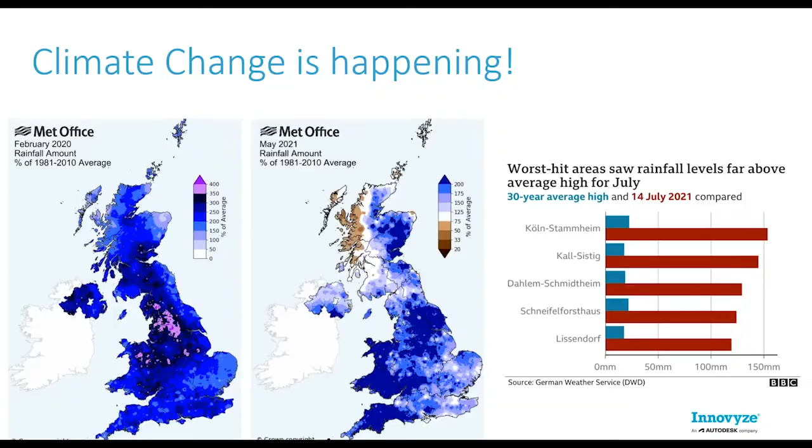A nice high proportion. I think we're stuck on 80% of the audience; it's a big audience. Thank you. Thanks, Sam.

So there we are. I think that's an interesting mix there, Samra. What do we make of that? Has this been your experience, your personal experience as well? Yes, a lot of people blame site constraints, and from what I could see, this is, I think, the highest or the most common reason why people are not pushing for SuDS.

Now, I myself used to blame clients. I used to say, "Oh, my clients are concerned; they don't want SuDS," and we jump when they say. But I've recently realized that it is my duty as a designer, or when I was a designer, to inform clients and give them the reassurance and help them make an informed decision.

So in this presentation, I will share the common 6 reasons I've heard from designers and clients why they don't want SuDS, and we will maybe have a discussion and iron out some of these reasons, or hopefully all of them. Yeah, it's interesting because, plus or minus, between the 5 different options there, it's ranging from 17% to 26%, so very slightly in favor of the site constraints. So it's literally where we can't physically get our heads around how we can implement sustainable drainage systems.

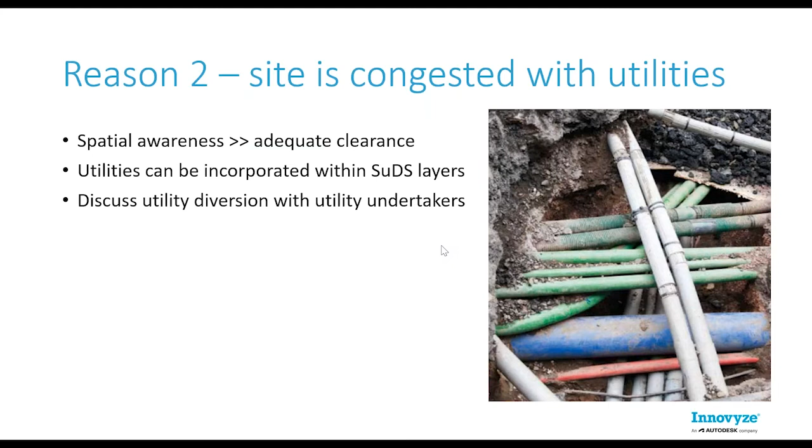Another reason people talk about is, oh, I cannot infiltrate, so I'm not gonna implement SuDS. Well, yes, high groundwater table, impermeable soil, proximity to building foundations, or being on top of a source protection zone can impede infiltration, of course. We shouldn't infiltrate if we're on top of an SPZ, especially if we're picking up highway runoff.

And sometimes we're worried about structural problems with the foundation, especially if we are sitting on top of chalk. Maybe there are some dissolution features that we don't want to develop. But the answer for this is SuDS doesn't have to be infiltration SuDS. There are other types of SuDS we're going to talk about today that you can consider. They could be storage SuDS. They could be conveyance SuDS.

So you can block the infiltration. You can line your SuDS. You can line it from one side if you're worried about a certain side that is close to the foundation or to a highway structure, and allow infiltration from the other side. I mean, that would hopefully iron out the problem.

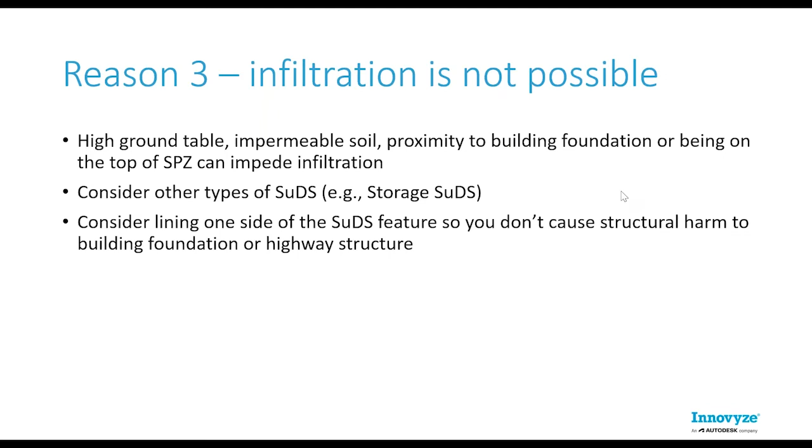Another reason people talk about is the location. So if you're near an airport, you cannot have SuDS that attract birds and some sort of wildlife. And in this instance, yes, we shouldn't have a pond, we shouldn't have a detention basin and a swale, etc. But we can still have an infiltration trench. We can still have a rain garden. So consider other types of SuDS that don't attract birds and whatnot.

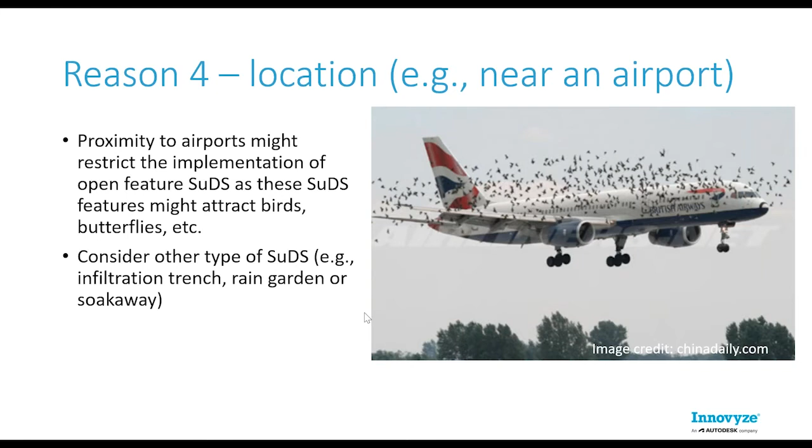Now, another reason I heard as well is the cost and maintenance. They say, oh, the client is worried about the cost. They don't want high maintenance features. And my response to this is, have you calculated the cost of flooding? A well-designed and well-constructed SuDS is not extremely more expensive than an equivalent landscape feature. I mean, a couple of inlets and a couple of perforated pipes will not blow the budget, but a destructive flooding will definitely blow your budget.

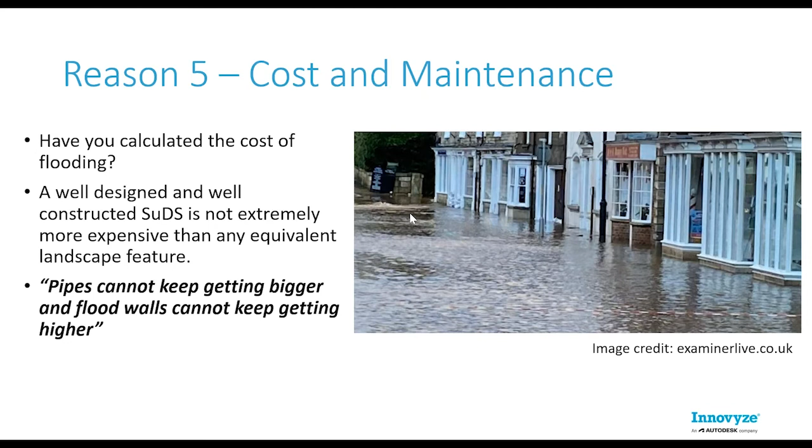Well, if it is, when the swale is full of water or surcharged, maybe the water will take a different route. So the length, the slope, the flow route, the roughness could be different, depending on the vegetation, the permeability, the hydraulic behavior. So a lot of basic parameters we're not sure of when we look at SuDS at the site scale or at the catchment scale. So my response to this is, don't worry too much about this.

As long as you understand the function of SuDS, what you're trying to achieve. When I say function, if you're trying to have some storage, then think about the volume, the storage and the levels, etc. If you're trying to convey the water from A to B, then you need to think about the length and the slope. Maybe you can do some stress testing for various scenarios. If you're trying to infiltrate, then look at the soil, the layers underneath, and what can happen. Introduce maybe a clogging factor, and rely on the SuDS guidance available.

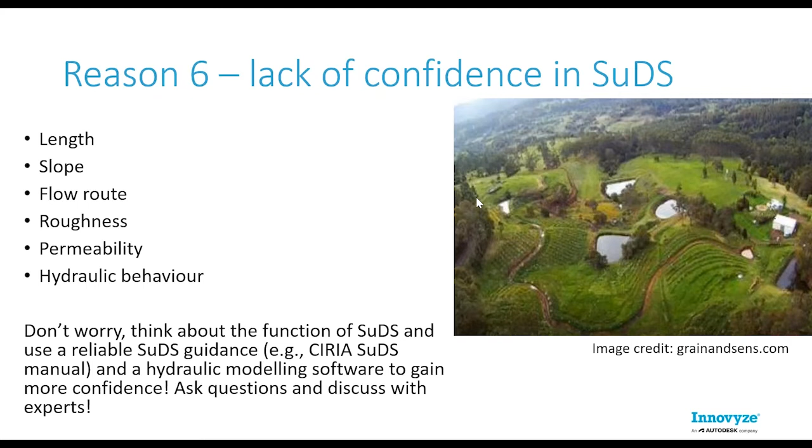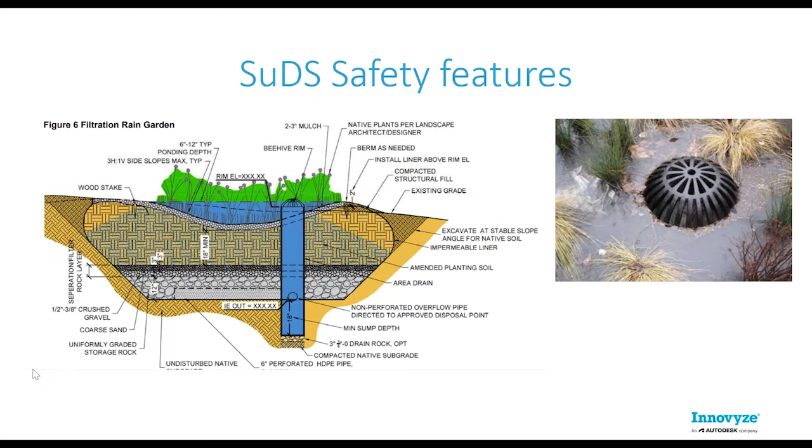Now, remember that you can always have safety features in your SuDS. For example, whenever I design any rain garden or SuDS feature, I normally have a spigot and a vertical pipe that can allow water to bypass the soil, so the soil doesn't become a bottleneck, and take the water directly either to the storage layer or maybe a gully. So your SuDS can become a gully when it's overwhelmed. So basically, if you flood, you're going to have to think about other elements in the system to blame than SuDS.

And yeah, as I said earlier, don't get hung up on the name of SuDS. I see a lot of debates about, yeah, this is a detention basin. No, this is not a detention basin, it's a pond. Oh no, it's linear and it's taking water from A to B, so I'm going to call it a swale.

Understand the functionality, and maybe you can categorize SuDS into 4 categories or 4 types: storage SuDS, infiltration SuDS, conveyance, and source control. Storage SuDS is like a pond. We use it to store the water. Conveyance is when we use SuDS to take the water from A to B, and it can have a storage element. So of course, maybe we can have one SuDS that has 4 elements.

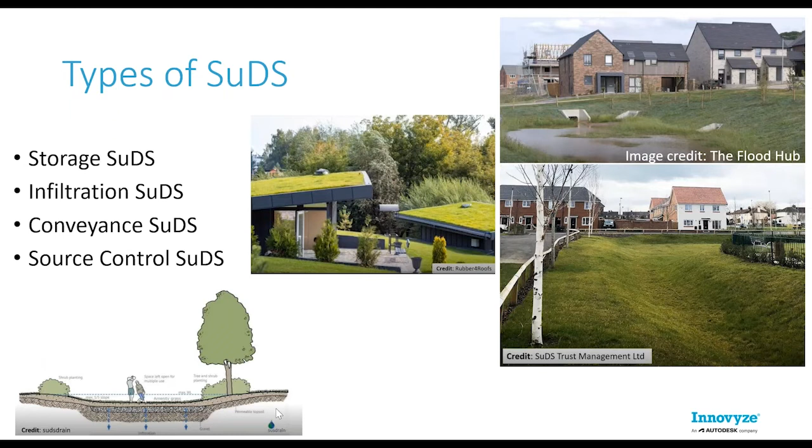Okay, so with that, I'm going to show you an example and talk about the typical steps to design and model a typical SuDS project on a master plan level. I will try to cover most aspects and issues encountered when designing, modeling, and making decisions related to sizing and constructing SuDS features. And then we will see how InfoDrainage will accelerate the process and save time that we normally waste on design iterations resulting from the lack of spatial awareness within a hydraulic model.

Now, in a typical SuDS project, the client issues a brief to the designer, communicating their objectives and saying, okay, this is what I want. I would like you to propose SuDS in this site. And this is a flood risk driven project, or maybe an aesthetic driven project, or water quality, whatever. So you're going to get the client objectives.

And then the designer needs to start with a feasibility assessment, checking the levels of the site, so maybe commissioning a topo survey, checking the utilities within the site, so commissioning maybe GPR to understand where the utilities are and how deep they are, and this is very important. CCTV of the existing drainage system, because we're going to connect SuDS somewhere.

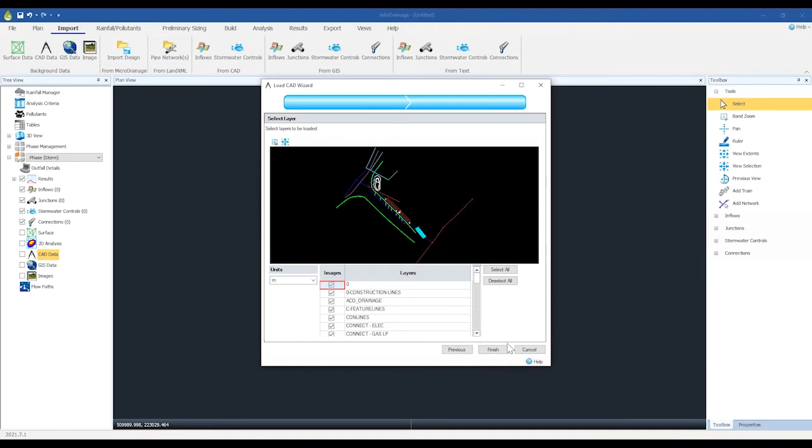So if I open InfoDrainage, the first option that I have here is to import a CAD layer as a background layer. This will bring in all the constraints that I talked about and the sketches that the designer has agreed on with the client. So if I import the data here and say, give me the SuDS background, now we see that this is the site.

It's a carriageway. We're going to drain it into SuDS. And there is some runoff expected from permeable areas, so runoff from greenfield areas, and that will be captured maybe in a cutoff drain here. So we're going to have a swale that is serving both permeable runoff from the east and impermeable runoff from the carriageway. And we checked that the only possible way to discharge is a combined sewer.

So we can rely on infiltration to help us reduce the discharge, but we need to connect to a combined sewer in the area. So we talked to the water company. The water company said, oh, this is a combined sewer. We have an objective to reduce the discharge as much as possible. And yeah, we agree with them.

And this is why we need to find a solution to slow down the response, reduce the rate of the discharge into the combined sewer, and ensure that we don't flood our site. So how are we going to achieve this? If we rely on a gully pipe solution, we're going to end up flushing the combined sewer during the peak of the storm. Water will shoot off really quickly in maybe 8-10 minutes.

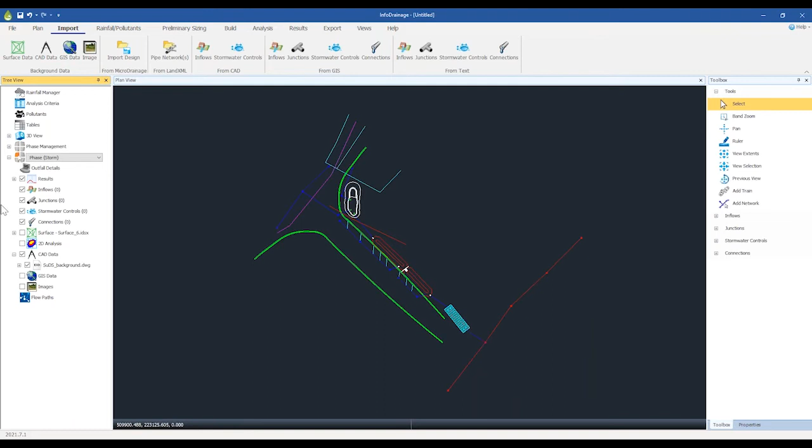Water will be in the combined system. It will surcharge really quickly. We're going to flood upstream, and we're going to cause a problem, and no one will be happy with that. So what we need to do is try to find a way to slow down the water and capture the water in stages. And when we commissioned a topo survey, which I will import now, I will right click on surfaces and load surface, and I will import the surface here.

So we commissioned a topo survey, and we realized that this is a very steep site. We see from 197 all the way to 188 here. So we need to think about these solutions that I talked about, the check dam and maybe compartmentalization, etc. So how will InfoDrainage help us accelerate this?

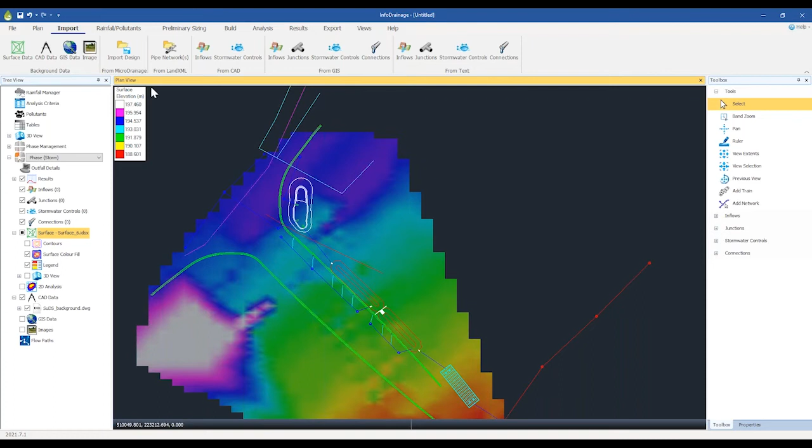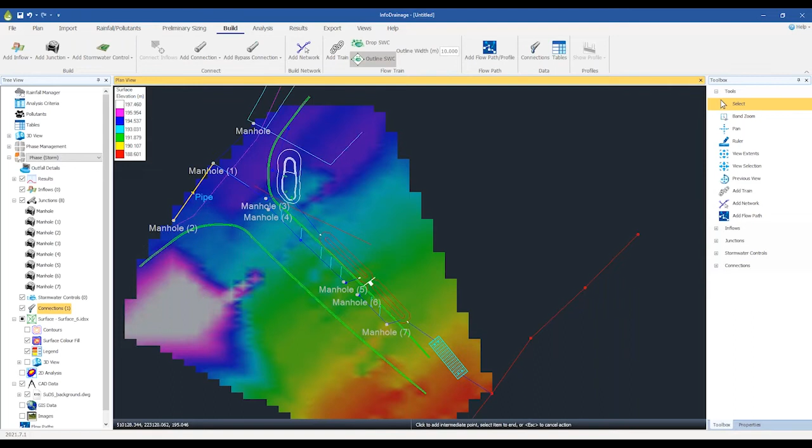So in the past, we would typically start modeling the pipe network. So if I start, for example, building the junctions, I can say, okay, I have a junction here, a junction here, here, here, and then I can start building the connections, the pipes: I have a pipe here, another pipe here, and a pipe here, and similarly, and then we start building the SuDS structures.

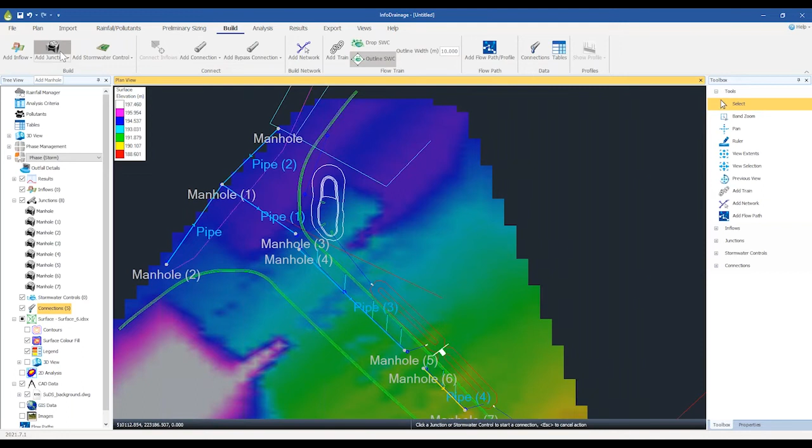Now, typically, we used to drop the SuDS structure on a triangle. It used to be some sort of a triangle in the middle, and we get all these incoming pipes towards the triangle, and you're gonna get some pipes with the wrong length. We're gonna get some dummy pipes to get things working, and there is no spatial awareness of where the SuDS footprint is, and whether the size is working or not, whether the volume has been achieved.

And in this case, if I turn off the surface, this pond here is surrounded by utilities, by a gas main and by a high voltage cable, and we've been given this top area as a constraint. So we're going to see now how you can model exactly the same area in InfoDrainage, and you can get the inlets represented exactly as they're going to be built, so you don't have to always explain to the person who's CADing the drainage design, oh, this is a dummy pipe, don't worry about this, you need to put this here. And normally this is when mistakes happen.

I experienced it myself when a client called and said, hey, can I get you guys to upsize the pond, or maybe change the location, so we moved the pond to the right, etc. Because of this disconnection between the modeling and the CAD, we ended up clashing with utilities. And it does happen. It happens all the time.

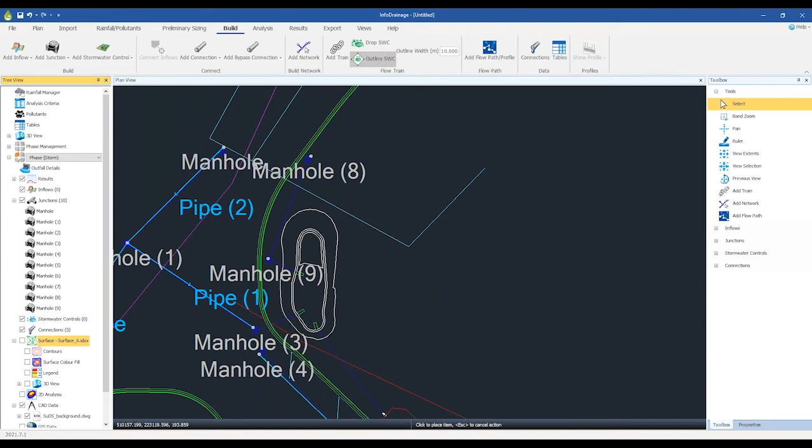Then we have to do another design iteration and look at another solution, maybe downsizing and taking the new volumes and the new footprint, base area and top area to CAD, checking things, and then putting this back, because we used to see only a little triangle in the previous software, MicroDrainage. And in here you can easily see where things are, where the inlets are, and where the outlets are.

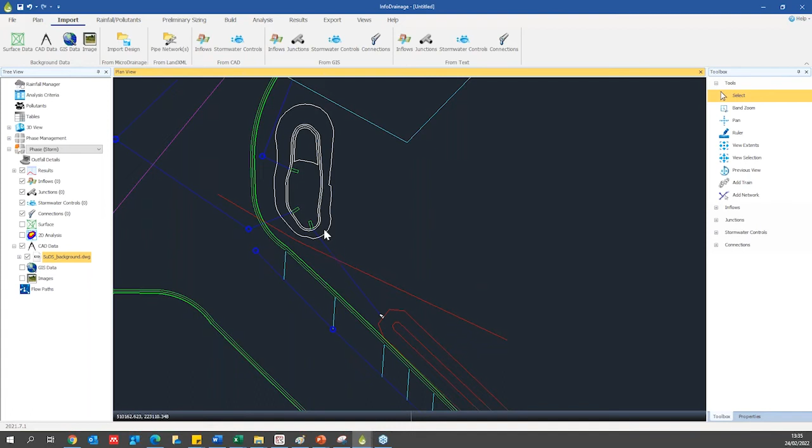And not only for visualization purposes, the software will calculate on your behalf the time of concentration based on where the inlets and outlets are. So if I want to design this pond, you have the option to import the top area as a GIS polygon and work from it, or you can digitize it if you want. So you can easily go to build, add stormwater control, and add a pond, and say, okay, I have a pond here, and this is the top area of the pond.

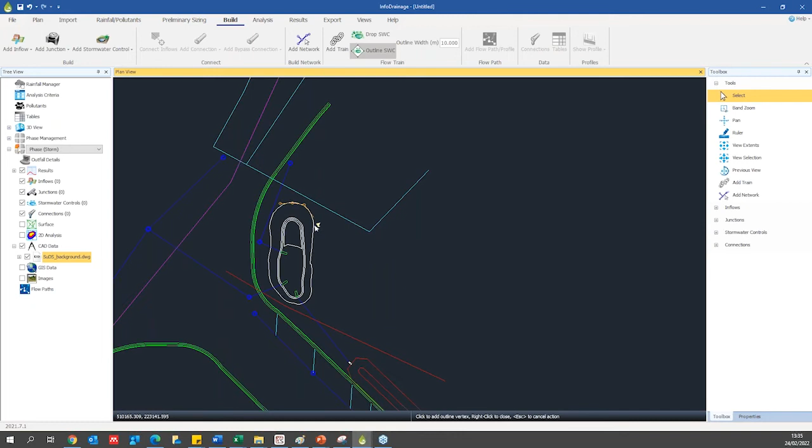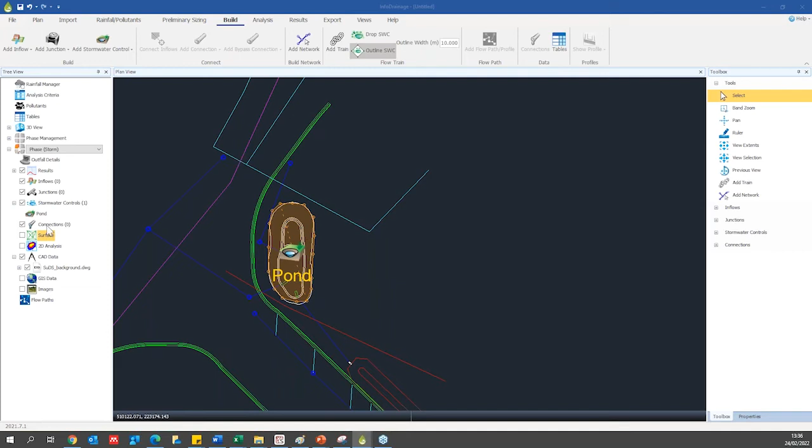And then once you have it, you can double click and, of course, we need to import the surface again. Okay, so you can click on the pond, you see that the exceedance level has been picked from the surface, and you can say the depth is 1.2 meter, and it will calculate the base level, and then you say at 1.2 meter, the area was 575,

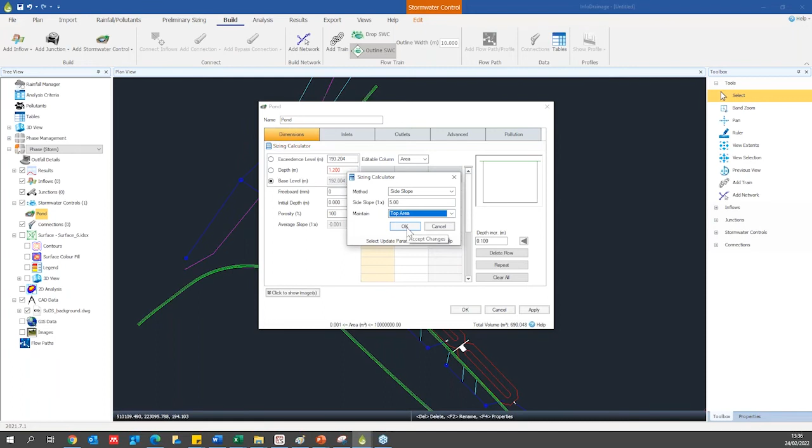and you can go to the sizing calculator and side slopes. You say, if I want to go 1 in 3 or 1 in 4, or let's go 1 in 5 to make it people friendly, and I want to maintain the top area. So it can work back from the top area to the base area, or to the bottom area, or you can work from the bottom area.

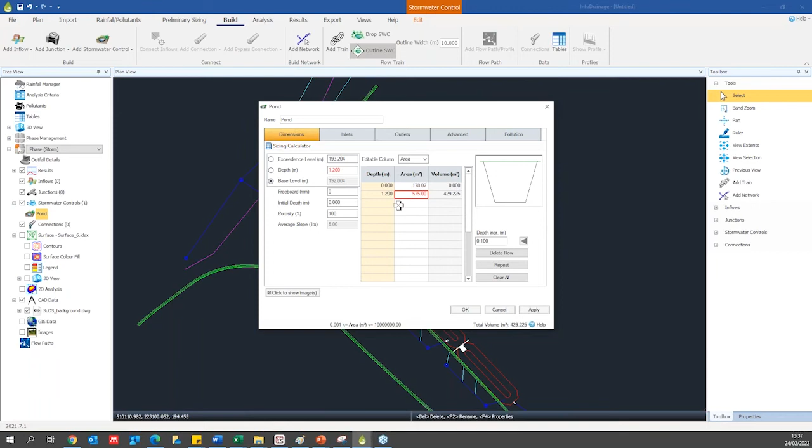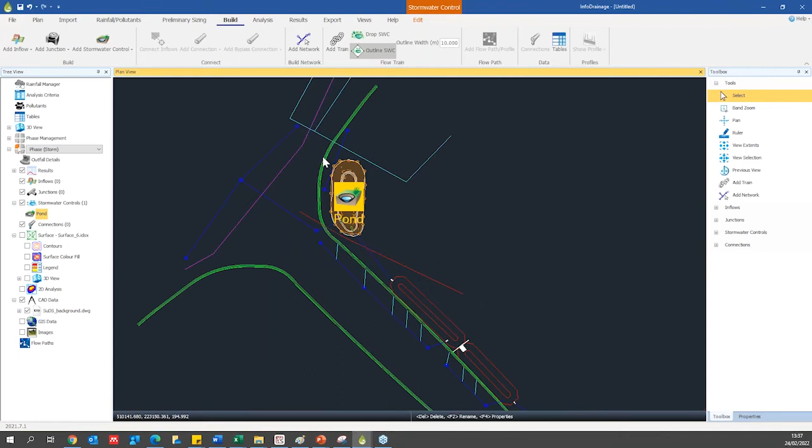If you have the bottom area and you want to know what is the land take, you can call the client and ask them to purchase land. Now you can give them this number, for example, 575. But in this case, during the concept design, they gave us what is the maximum area that we can take, or the land take, and we worked backward. So let's say we agreed on 178 and 575, and then you can say okay to that. And now you see this is the base area.

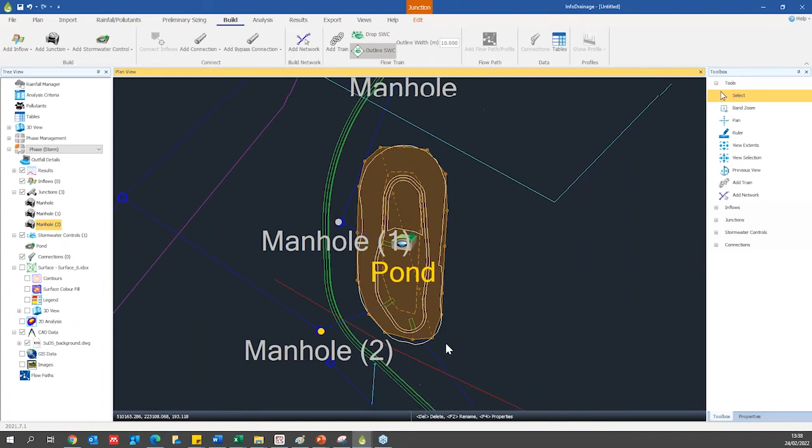Now when we want to connect the pipes in here, we're not connecting into the center of the pond. If I add a junction here, another junction here, we're basically connecting into wherever the inlets and wherever the outlets are. So in this case, if I go to the connection, I can say this pipe section is going to go into this inlet, and this pipe is going to go to this outlet, and that will be taken into account when calculating the time of concentration within the pond.

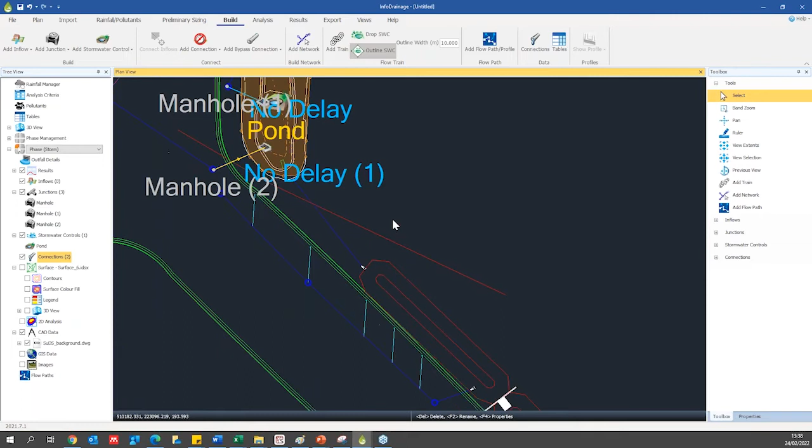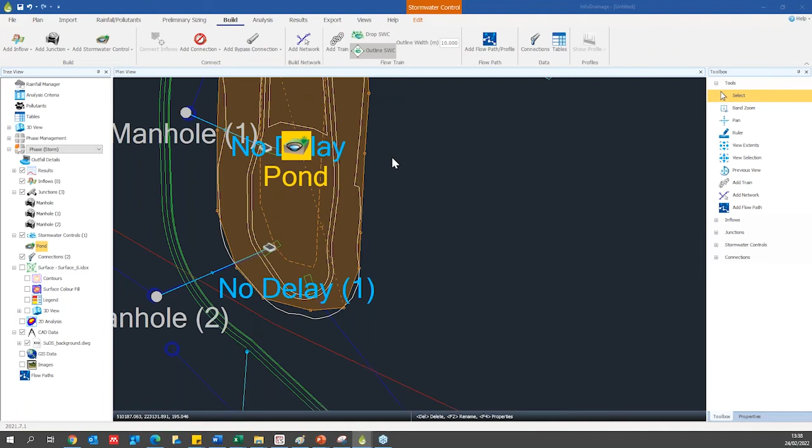And then once you build the downstream systems, and we're going to take an outlet from the pond, the software will realize immediately that this is water leaving the pond, and we will see how we're going to model the flow controls. Okay, and now we have the swale. Of course, once we get to the pond, you can add infiltration from the side, from the base. You can add Manning, because now the movement of water within the pond is being simulated.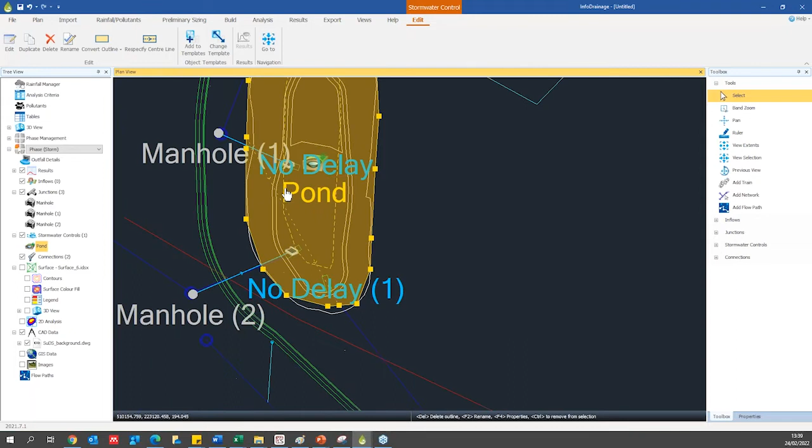And maybe you can redefine the center line. You see there is a center line here. If I go to edit and I say respecify center line, and the center line is from this point to the outlet. So you can do that, because this is where water is entering the pond and this is where it's exiting.

And now we're going to model the swale. Within the swale here, if I have one section for the swale, it's going to be a steep swale, and we won't get the volumes to be utilized. So we will use a feature within InfoDrainage called the train feature. If I click on add train and I go to swale, I can easily say, this is the first section of the swale. And now this is the second section of the swale.

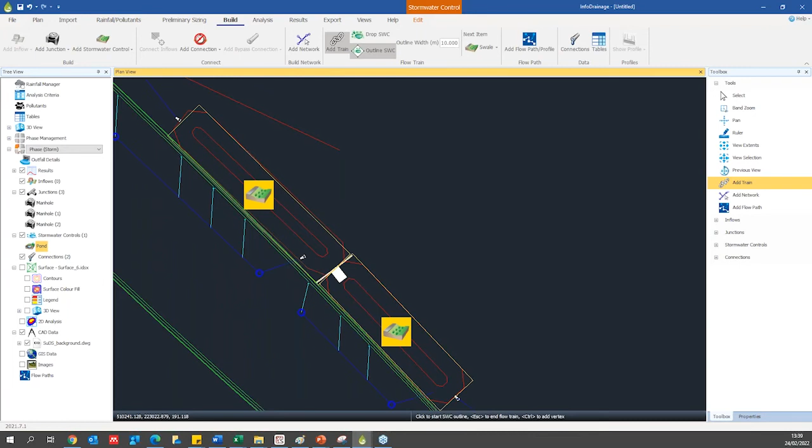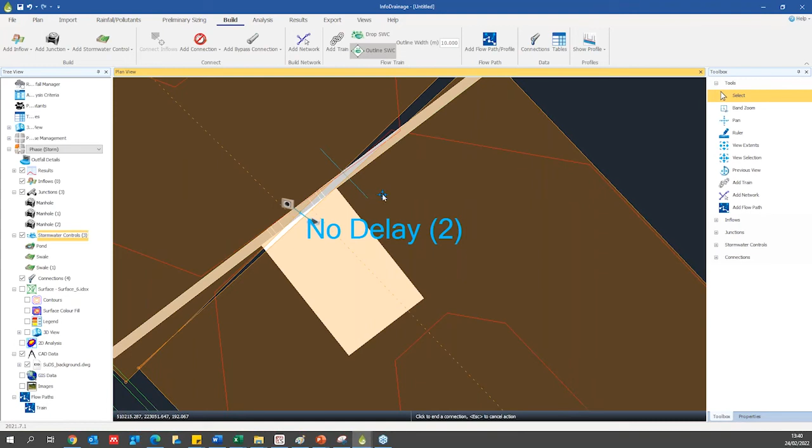And the software will understand that there is some sort of an outlet, some sort of control going on between these two sections. And if I want to represent the check dam, it will not be only one orifice. It will be an orifice and a weir. So I need to add another control and say that this is going to be a weir.

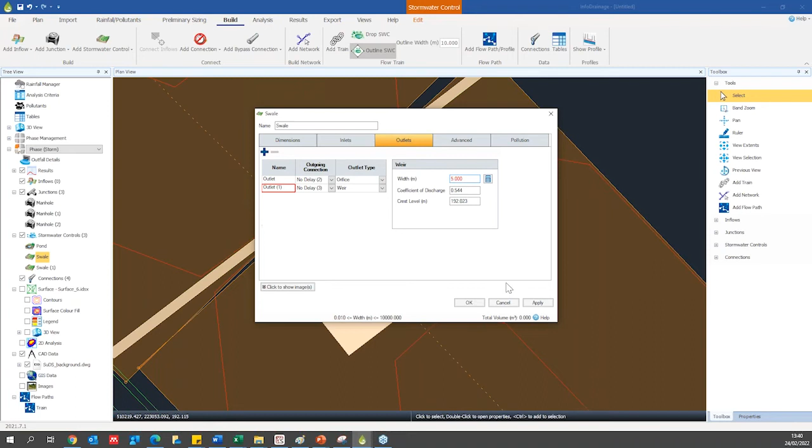Let's use a weir, and this is going to be an orifice. So the orifice, let's say it's 100 millimeter. Normally, if you have an orifice in the open, it should be more than 100, but let's say 100 millimeter, because it blocks quite easily. And the width of the weir, let's say 5 meter, depends on the check dam. And then you can say okay to that.

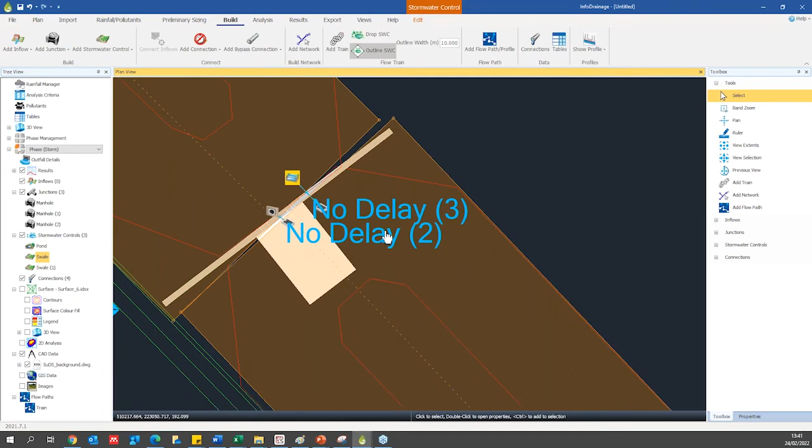So you see, water will get to this point, and the orifice will dictate the movement of water between the swale and the second section of the swale. Now, once we exceed the top level of the swale, the weir will be triggered, and it will be taking the water via the weir equation and the orifice equation at the same time.

So now someone can look at it and say, okay, I see what's going on. If I double click on the swale, I see the inlet. Here, the inlets we haven't modeled yet, but I see that we have two outlets. It's quite easy, and you can determine immediately what's going on.

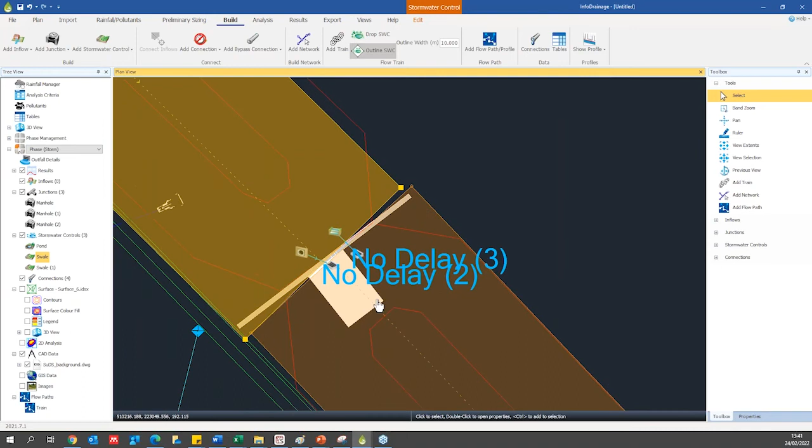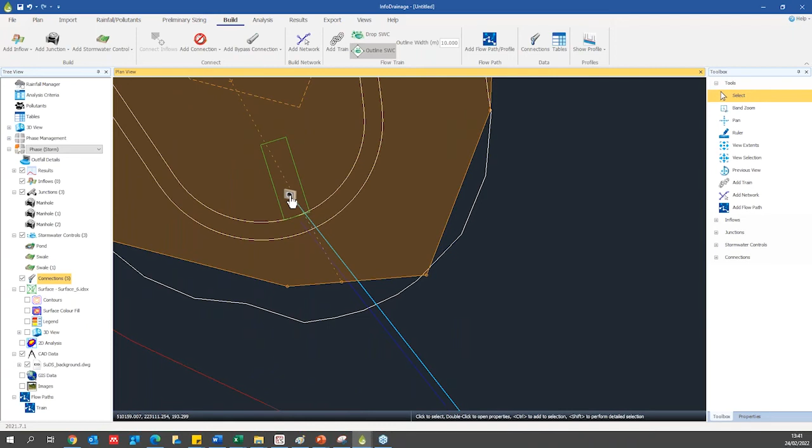And if I want to model how water will leave the pond and enter the swale, I can easily say, okay, this is the outlet point. This is where I have my head wall, and this is the swale inlet. So once you do that, the software will realize immediately that you have some sort of a control going on here. So you can double click on it, say this is an orifice, and the diameter maybe is 50 millimeter. And now water will be transferred towards the swale.

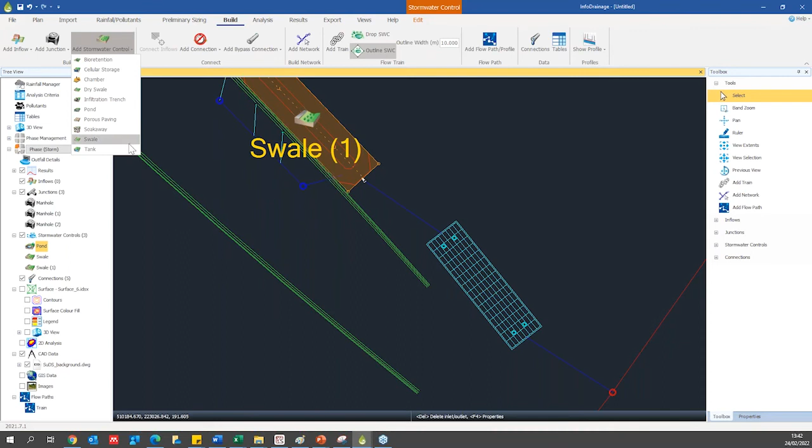And then from the swale, we have a tank downstream. And then from the tank, we're going to discharge into the water company manhole. So similar to what we've done previously, we're going to build the tank. And we can say, this is the tank. And this is the connection, and it's going to be from here to here.

So if you notice, we don't need to add a dummy pipe; all the pipes are being represented physically as they are. So if you export this model to a BIM model, everything is there. You won't get someone calling you and saying, oh, what is this for and what is that for? And sometimes they issue construction drawings with elements that you just had to add to make something work. Sometimes we add the dummy pipe so we can have a control on the second downstream pipe, etc. And it confuses people, and it's not good for BIM purposes.

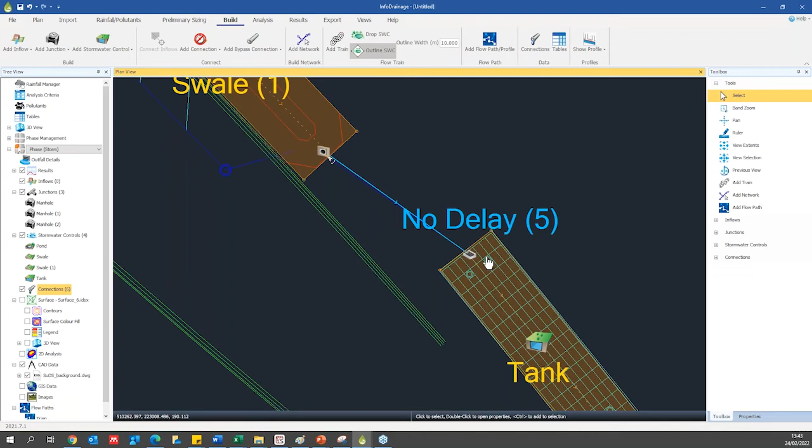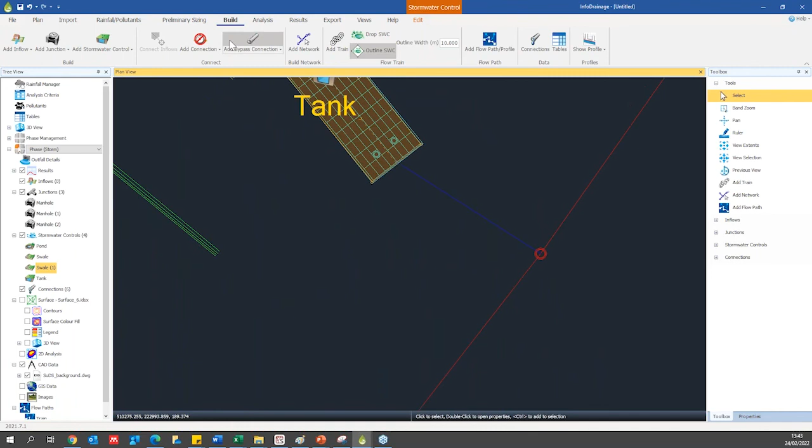But in this case here, we have an outlet, swale outlet. So we take the water from the outlet. We just need to say that it's a 100 millimeter orifice. And again, clients don't like 100 millimeter orifice if it's in the open, but yeah. Finally, we're gonna add a junction here and connect the tank into the junction.

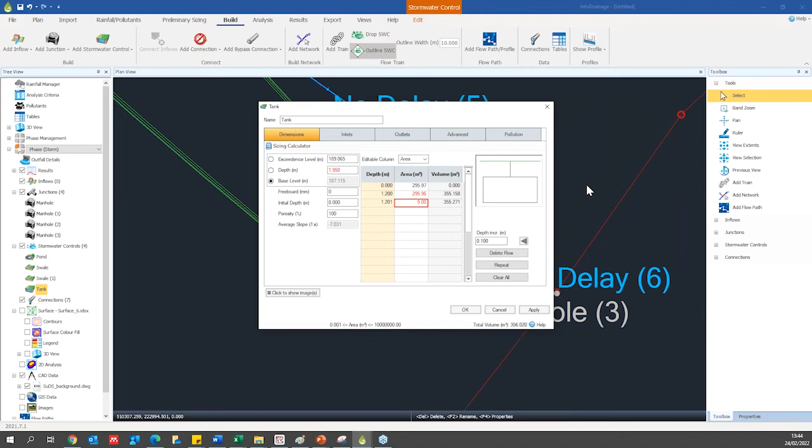And of course, you would need to model the tank if it's like a 1.2 meter tank. Here, the software picked the exceedance level. And if we say, let's call it 1.95, so at least we have 750, maybe 95. So we have a 1.2 meter tank and 750 millimeter of cover, because the tank structure would need some sort of a cover. So this represents the chamber, the access chamber to the tank. And then once you say okay to that, now this is your tank.

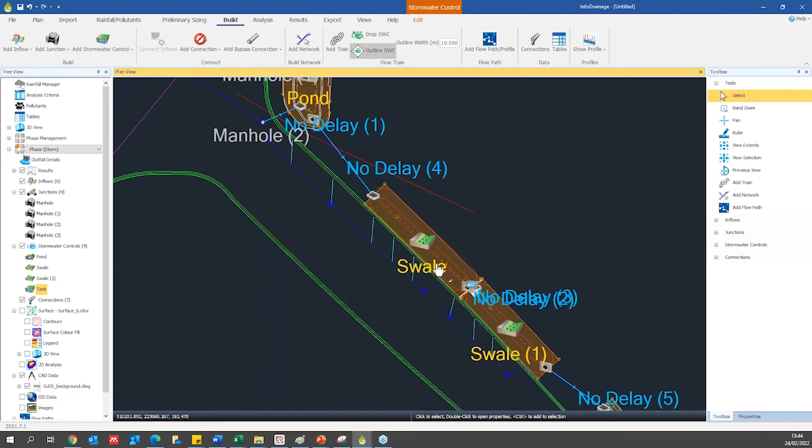Now water is getting into the swale from a carrier drain that the council built, and it's not a water company pipe, it's a carrier drain to pick all the gullies and then have one connection into the swale. Now, in the past, we used to have to create a junction in the swale, and that junction used to have the data associated with it, and then we would connect into the junction, and when we export it, it will confuse the CAD people.

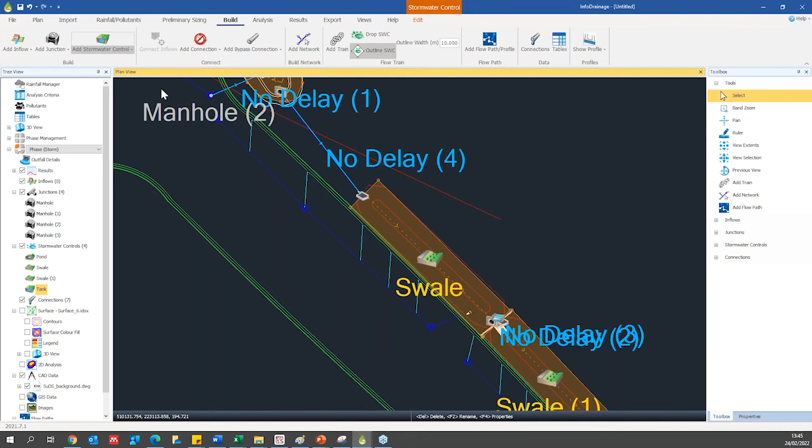So now you can go carrier drain, manhole, manhole, and manhole. And then you can have a pipe. And you can say this to this, and this to this. Exactly, this is where the inlet is. All we have to do is have an inlet like this. And if there is a control, you can just describe it. If it's a direct discharge into the swale, you can just put it here. And similarly, we're going to do the same here. So we're going to add the junctions, and we will model the carrier drain.

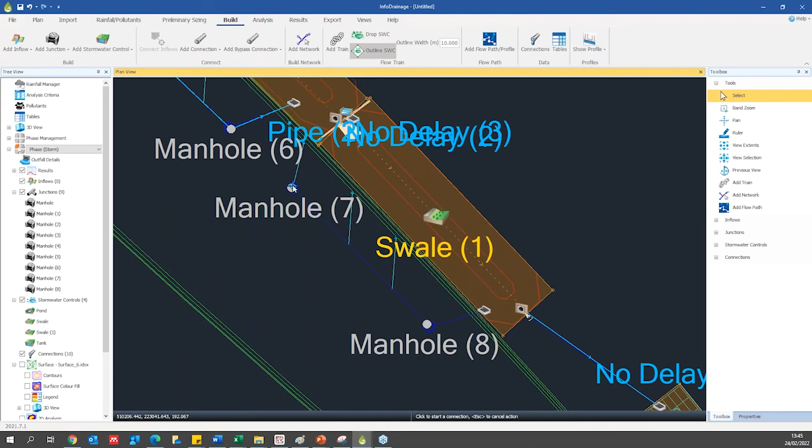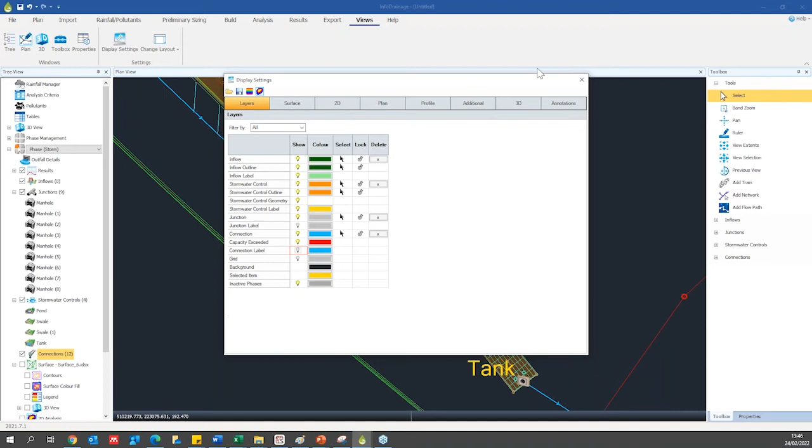Okay, so now let me enhance the view and let's take off the labels. I'll keep these labels, and we take the junction labels and the connection labels. Okay, so we have the connection exactly where they are. You don't need any dummy pipes, etc. You have the spatial awareness of your SuDS features.

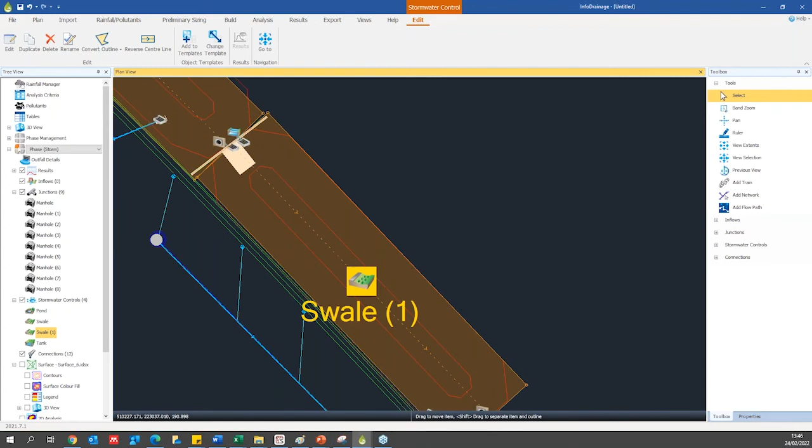If there is a pipe here, or something here that we cannot exceed, you can easily understand what's going to go on if you upscale the swale, or if you increase the top width or the bottom width. So if I double click on the swale here, I can see the exceedance level, it's been picked. And let's say if it's a 1 meter swale, the top width has been picked from the digitization.

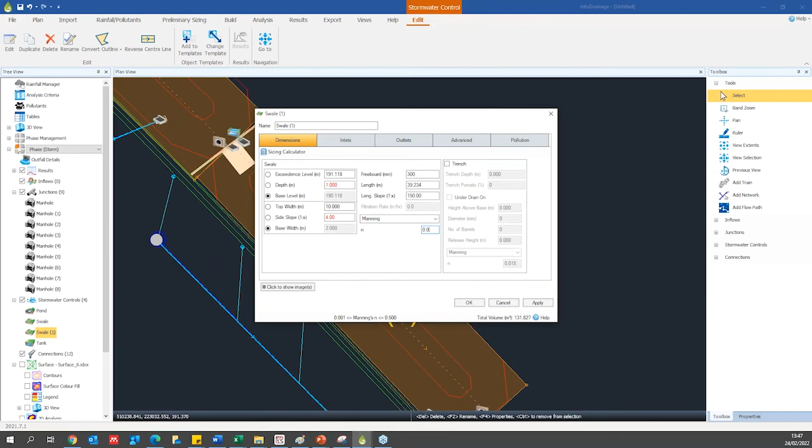If you say it's 1 in 4, the software will calculate the base width. And if you say that the freeboard should be 300 millimeter, that will be taken into account. And you can check the levels and say, okay, the longitudinal slope is 1 in 150, for example. And Manning, assuming it's a vegetated swale, should be anything between 0.03 up to 0.09, depending on the type of vegetation. So let's go for 0.03. And you can say okay, and that's the swale model.

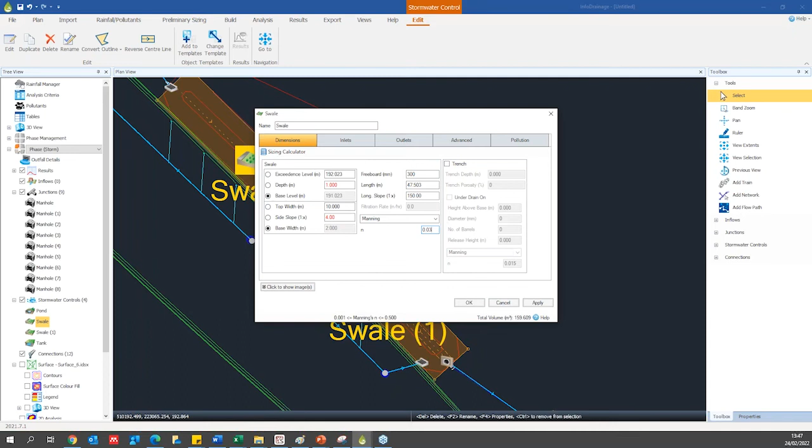So you see there's some sort of a representation of the base area, in here, dash line, and then the top area here. If we do the same thing here, we say this is 1 in 4, and the depth is 1 meter, and 300 millimeter, and 150, and 0.03. Okay, so these are all the elements of the model modeled.

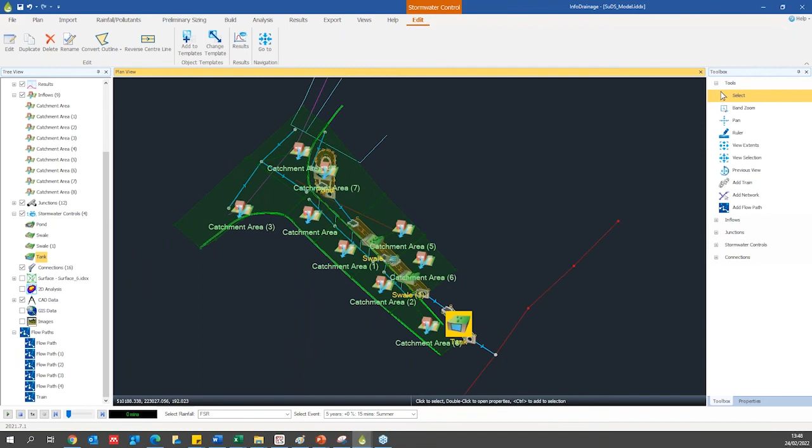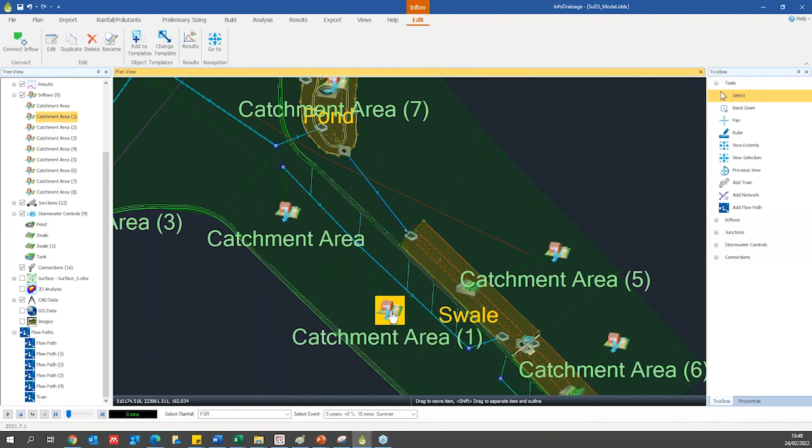Now I prepared a model that is ready to be simulated, and it's all singing and dancing. So all these subcatchments have been modeled, and let me explain a little bit about the subcatchment. We have the carriageway subcatchment contributing directly to the carrier drain, and once we draw them, InfoDrainage will detect immediately the upstream manhole. So if I delete this one maybe, and I say that I want to build an inflow and a catchment area, and I start digitizing.

Now, immediately InfoDrainage will be sensitive to the manholes within the polygon, and it will connect the catchment area automatically. Now, this wasn't possible in previous software packages. If you want to change the connection of the subcatchment, in the past we used to have to delete the subcatchment and digitize it again and say, okay, now we're going to connect here. But now you can easily say connect inflow, and I want this subcatchment to go here. So you can easily do this iteration, and it will save a lot of time.

I mean, if this feature was here in 2014 and 2015, it would have saved me hours and hours, maybe weeks of work, because I spent a lot of time in my life deleting subcatchments and redirecting them and doing all this associated work.

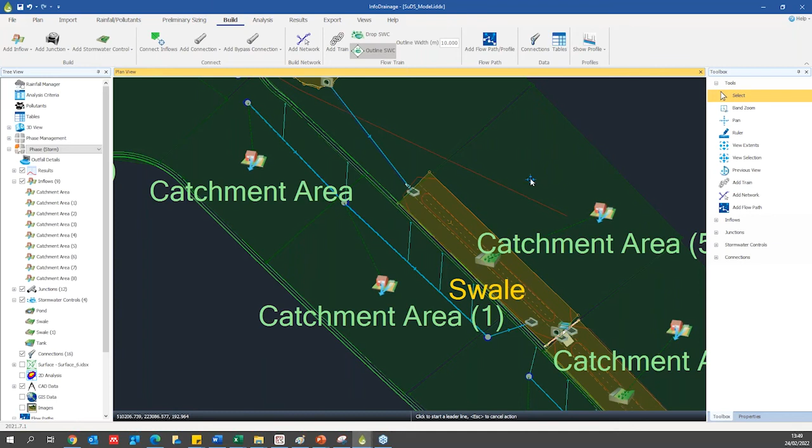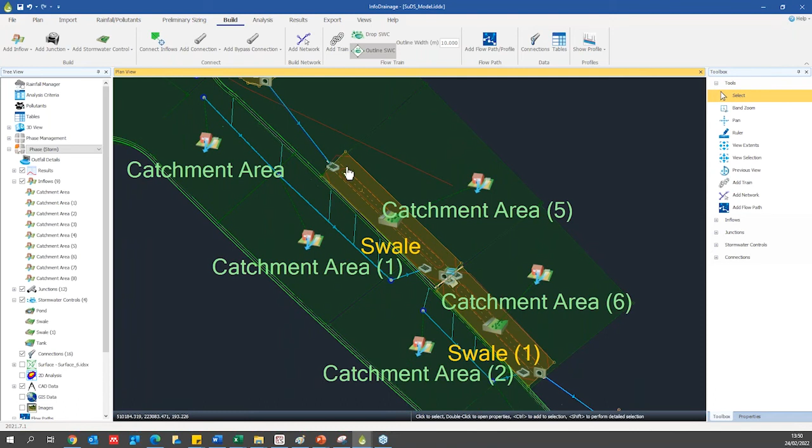So now we have these impermeable subcatchments contributing to the runs, to the carrier drain, etc. But we've been told that sometimes when it rains on the green field here, we get some permeable runoff. So to protect the carriageway, we put some swales. That was one of the reasons why we wanted swales. But at the same time, we want to account for these.

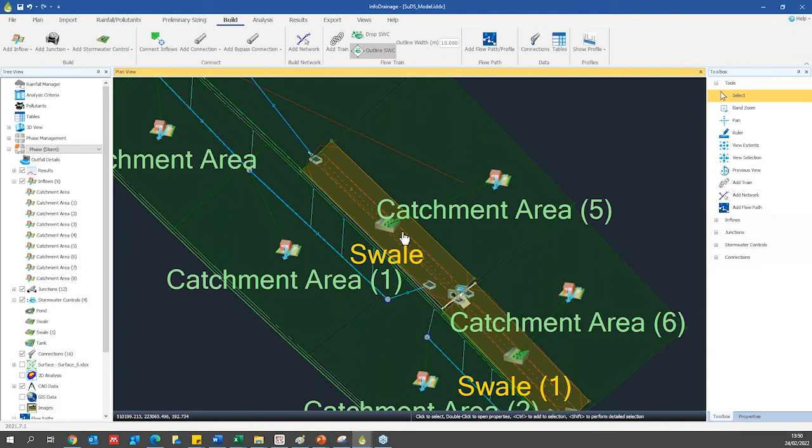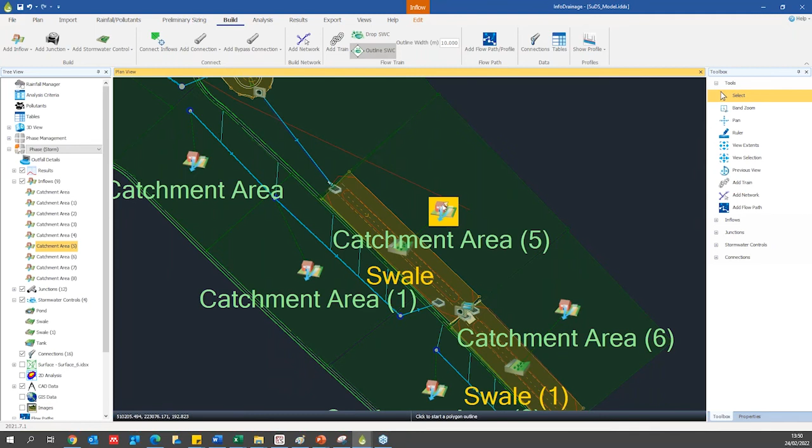In the past, we used to have maybe a node in the swale or another node and another dummy pipe, and we used to connect the subcatchment to the pipe and then connect it to the swale, or maybe have a junction in the middle of the swale. Now, if I delete this, and if I delete that, you can easily say, I want to have a catchment area, and you can digitize it. And it will be sensitive to the SuDS feature, and it will connect directly.

Of course, that's not an impermeable area, so we need to play with the parameters and say maybe Cv, the volumetric runoff coefficient, maybe it's 0.2 or 0.3. Do your studies and see what it should be. The time of concentration, this is a really important and nice feature here, that you can use some equations to calculate the time of concentration, because the permeable response is not like the impermeable response. It doesn't get to the swale in 5 minutes.

It will take more time with vegetation, with infiltration, with evaporation, with all these processes happening. And if you say catchment roughness is 0.4, you can calculate and get the travel time. So the software calculated the flow path length, and you can calculate the travel time. You say okay to that.

This is for sizing purposes, and now for dynamic sizing, for when you run simulation, you can say it's 0.3 and 0.3, and the time of concentration, I'm going to use Friend's equation, and I'm gonna say it's 0.4 and say okay to that. And now that's 100%, and you say okay.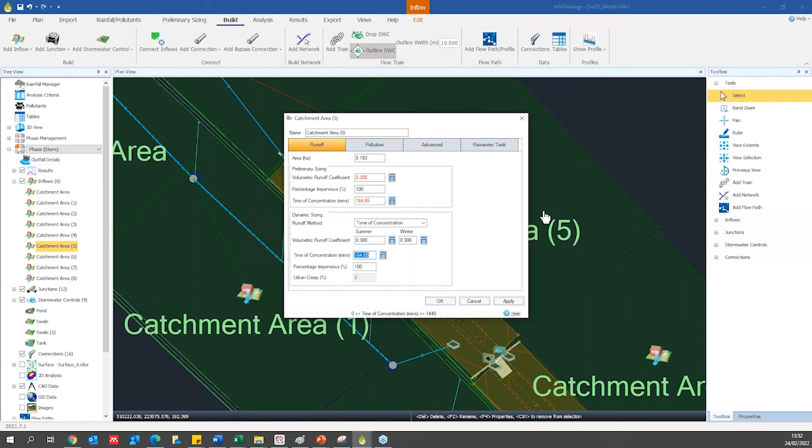You see the software now decided that this water that lands here, it will contribute to your swale over 164 minutes. It's not going to be in 5 minutes, which is a fair assumption. And we used to play with parameters in MicroDrainage just trying to replicate this, and it's all now there ready for you. So you have more confidence, and you have something to lean on when someone asks you, who told you that it's going to be 3 hours before you get a response? And you say, okay, I used Friend's equation.

It's within the software. You can see, and of course you have other equations that you can rely on, and you can read about them and see which one you want to use based on what you know about your subcatchment. So I found it really cool, and I wanted to share this with you. So let's say yes to that.

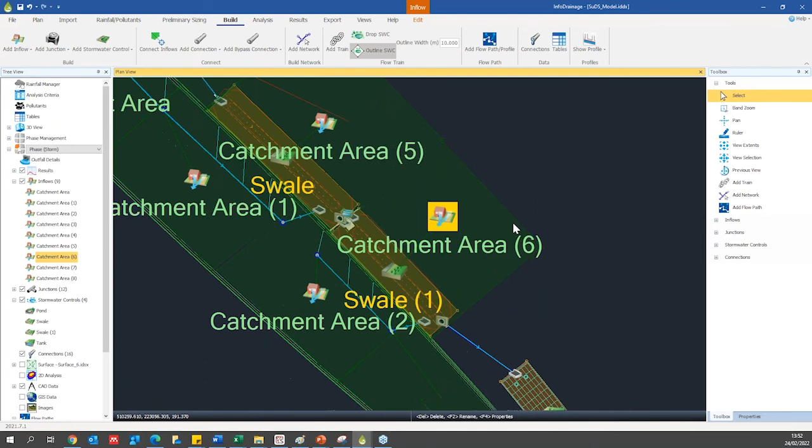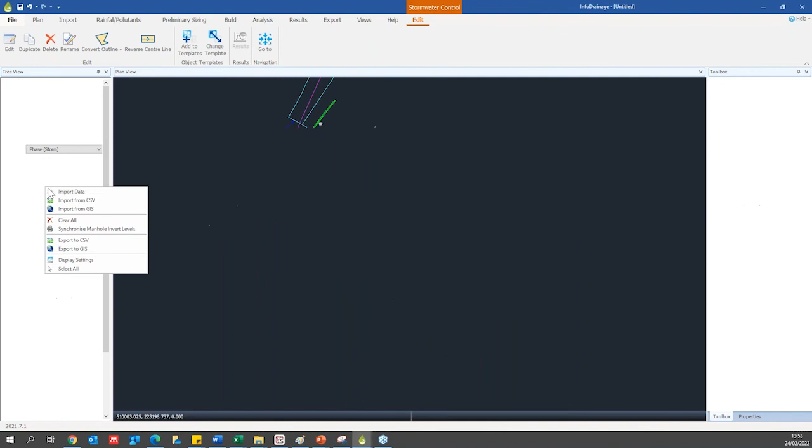And now, before I run a simulation, I wanted to show you another feature that can even further accelerate things. So if you have the polygons, if you digitize your subcatchments and your SuDS features, let me delete all of these. Let me see what you can see on the screen. Okay, perfect. So if I delete these, clear all. If I delete all these, maybe clear all.

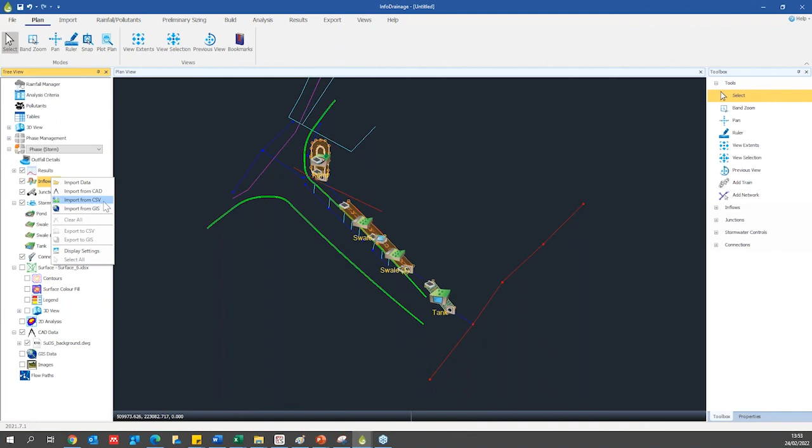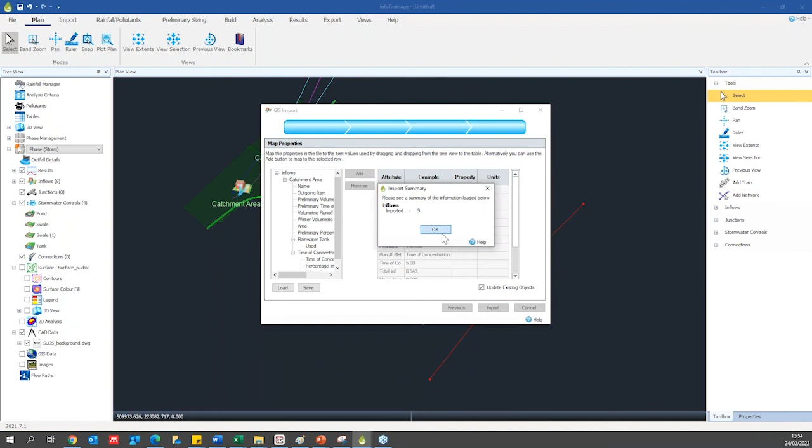Okay, so let's say that someone digitized the subcatchment in GIS or in another software, in CAD. You can easily now go to inflows and say import from CSV, import from GIS. And you can select and you say, give me the subcatchments. And you can say next, and you see them all here. And you can say, I want them to be green. And say okay to that, and then say next. And you can click import. Ta-da! You have all the subcatchments imported and ready to be simulated.

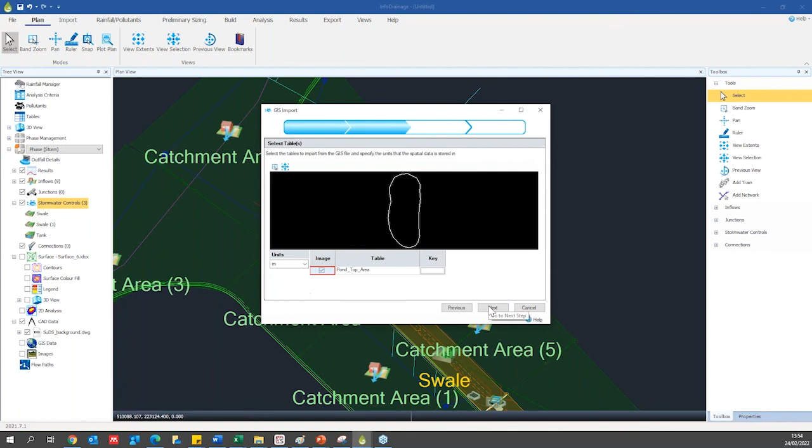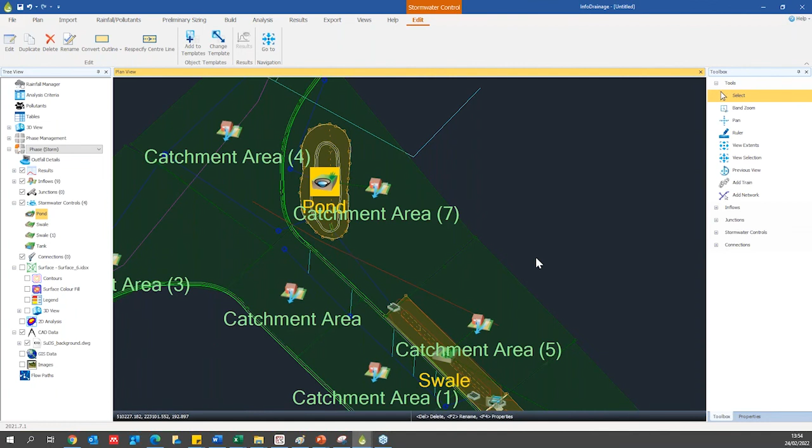Now, similarly, if you don't have this pond, let's delete it. You can import the top area. I think we've done that. And you can say this is a pond. You can get the software to recognize the polygon that you're bringing in as, let's say, a swale or a pond or a dry swale, whatever. So you can say next and you can say import, and you have now the pond, which you can start, of course, playing with the parameters to sort things out. Now, these are very, very helpful when creating a network and will help you accelerate the design.

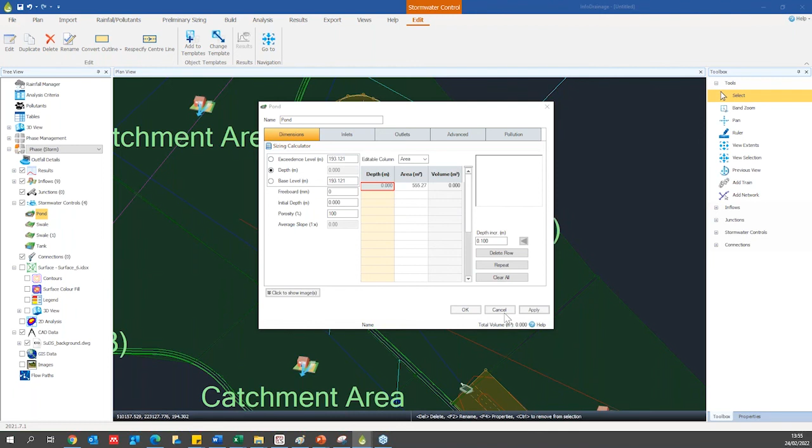Now, one last thing before we run a simulation is when you click on the pond, you can easily go to scale, and you can scale it by, for example, 50%, and oh, sorry, this is not the final model. But anyway, what I wanted to say is that when you scale the pond after you build your pond and put all the parameters, you can see whether you hit the gas main or not, and this is what we want.

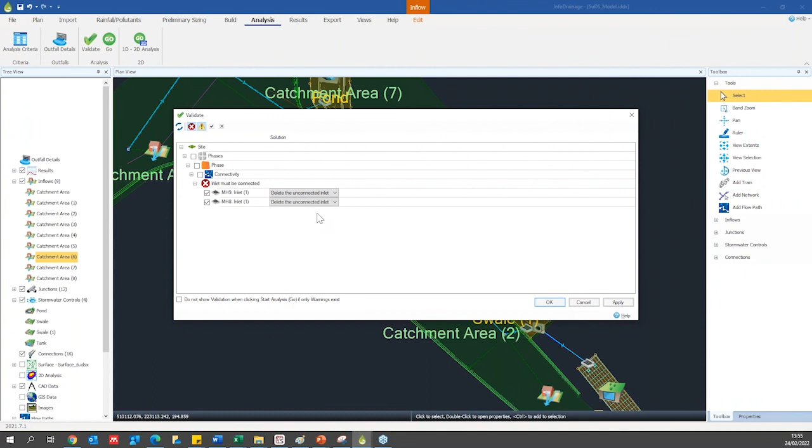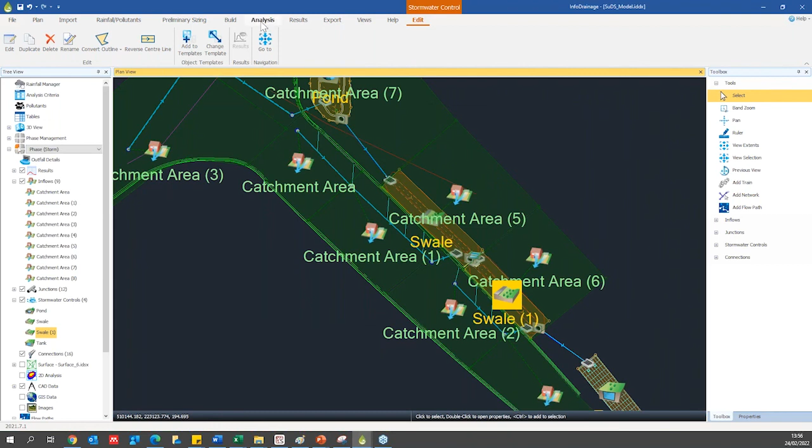If I switch back to the final model, the cool thing here is now you have validate. So if you click on validate, it will show you what went wrong with the model, and you have, for example, these problems here and there. If I double click on this and I make Manning 0, and I hit analyze and I hit validate, it will show me that there is something wrong and Manning shouldn't be 0. So I need to put it back at 0.03 and say okay, and now I can validate, and it's okay. Now, once my site is okay, it means I can run it.

Now, Pete, I'm not doing good with the time, right? You've kind of run out of time.

Bless you, but it's so nice to see, Samar, the fact that you're bringing in all the practical issues that you've experienced in real life, and showing people how much easier and quicker it is, not just to design things, but to edit them, import multiple sources and all that. It's answering a lot of the questions that are being raised.

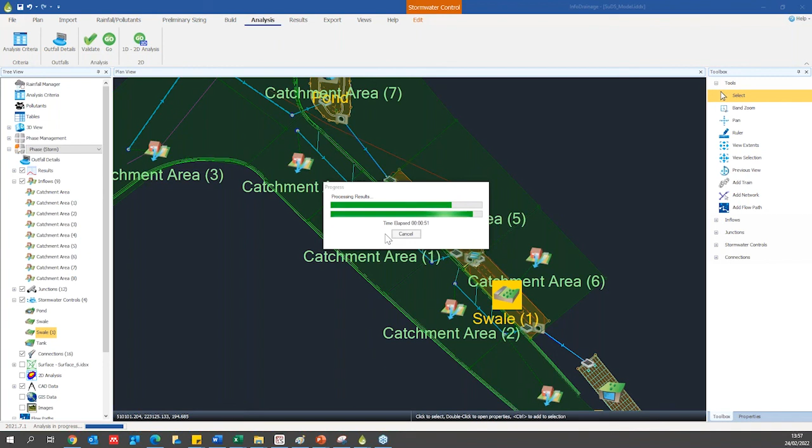But what I'm going to do is say thank you to everybody in terms of all the questions, because we're going to run further webinars, and there's a lot of questions that have come up on, for example, thank you, Renuka. There's things like when we're putting in an under drain beneath the swale base, how do the flow paths work between the swale at the surface and the under drain? Is it fully interlinked, or do they work independently?

This is the whole thing with InfoDrainage, Renuka, that we've brought everything together so you can now design, model, and communicate your SuDS strategies a lot quicker and easier. And what we'll do is we'll answer all those questions in future webinars, if that's okay, because we are rapidly running out of time. But I'll let you wrap up, Samar, and then we'll hand back to Ben, and then take it from there. Is that okay? Sounds great.

Thanks, Pete. So once you run a simulation, now you get a report on all your SuDS features and what is the inflow, what is the outflow, what is the depth, what is the water level, the resident volume, and whether there is a flooded volume or not, hopefully not, and you can see what is being generated from your SuDS in every storm or in the critical storm, for example.

And you can also generate reports about your pipes, your manholes, your flow controls, your outlets, your inlets, everything. Even you can get a report about the subcatchments. So if I go to results, you can see the inflows, and for example, critical storm, each subcatchment, what is the flow that was generated from it? What is the rate and what is the volume? That is extremely, extremely useful, and I will end it here.